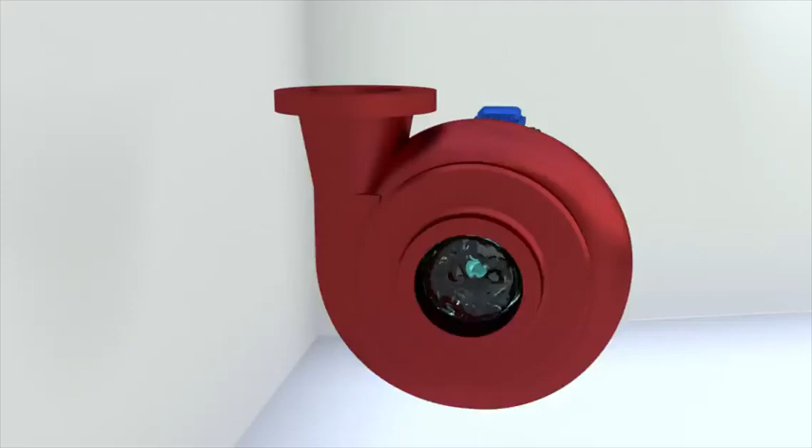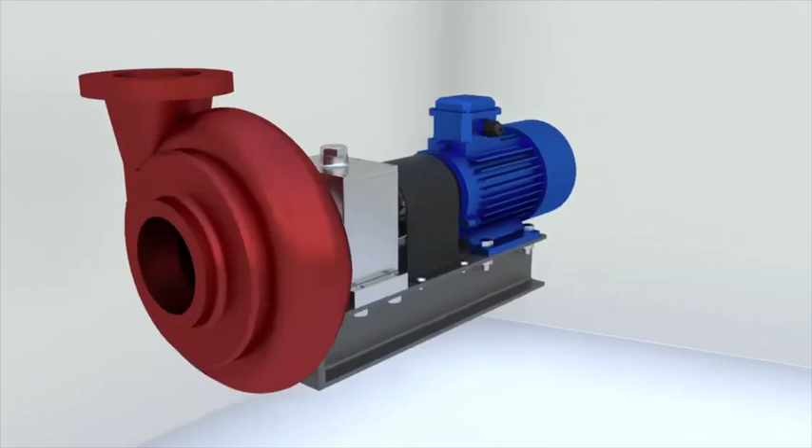How does a centrifugal pump work? Centrifugal pumps are used to pump water, oil, and other liquids. Let's try to understand why these pumps are designed to carry out the task of transporting liquids successfully.

The main elements of a centrifugal pump are the casing and the impeller, which drives the liquid. The impeller is mounted on a shaft, and the shaft can rotate on bearings. The power is transmitted from the motor, most often an electric motor, to the shaft.

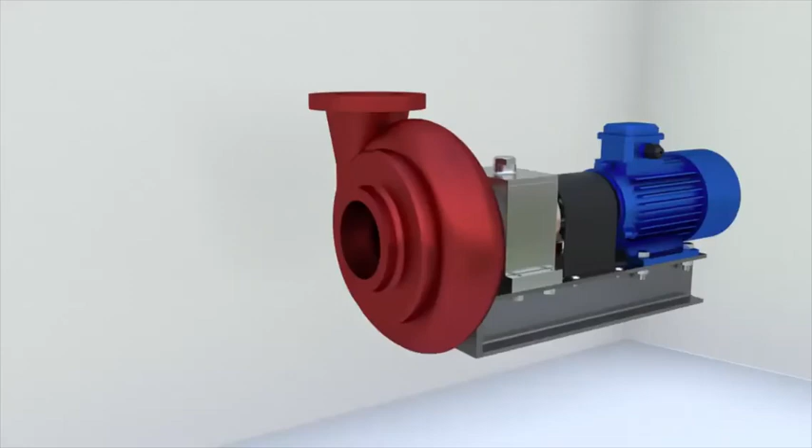The impeller of the pump rotates together with the shaft. The vanes in the impeller act on the liquid and make it rotate. The liquid particles are accelerated, and as a result of the impact of the vanes, the energy of the liquid flow is increased.

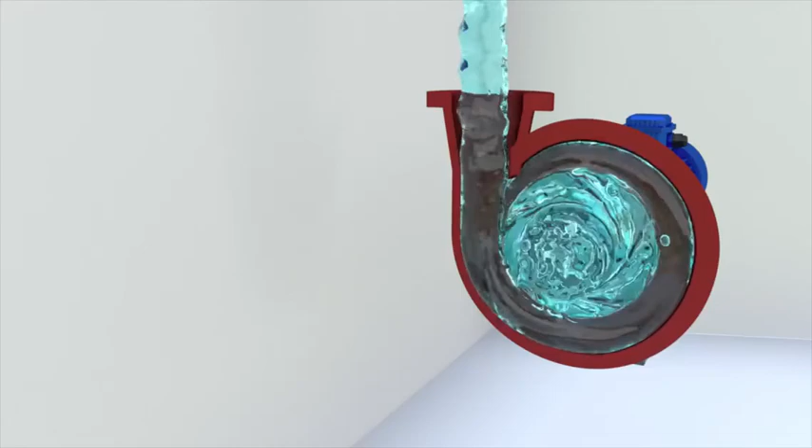The accelerated liquid particles enter the volute, which converts part of the velocity into pressure. The diameter of the passage section of the volute and the discharge nozzle gradually increases. The fluid velocity decreases, and the pressure, according to Bernoulli's law, increases.

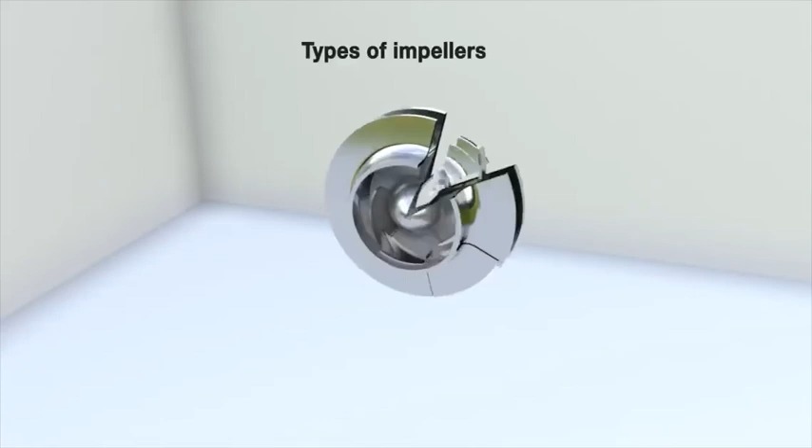Three main types of impellers are used in centrifugal pumps: closed, with back and front discs, vanes and fairings; semi-open, with the vanes free on the front side; and open, with the vanes free on both sides.

If bearings support only one side of the shaft, the pump is called a cantilever pump. It is a versatile design used in small and medium-sized pumps. A heavy impeller cannot be cantilevered.

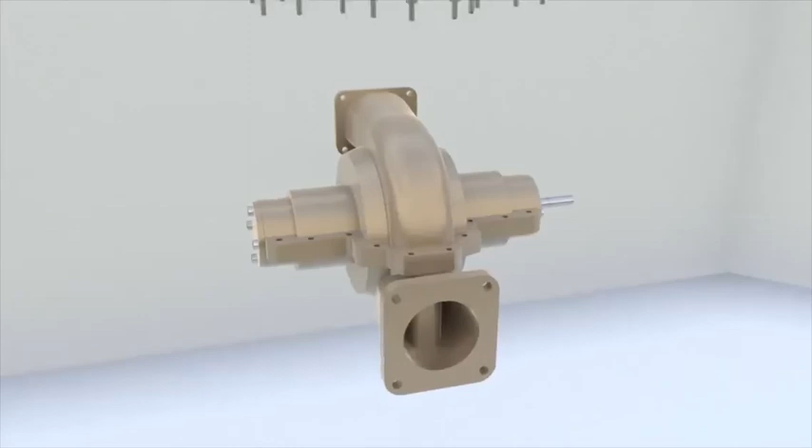In this case, the shaft is mounted on bearings and the impeller is placed between them. This construction scheme is well suited for double suction impellers, where the vanes are placed on both sides.

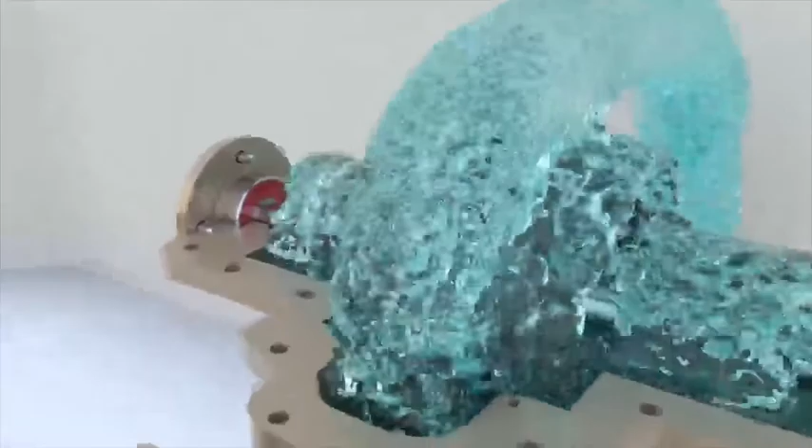A double suction impeller allows liquid to enter the impeller blades from both sides. Thus, we have two pumping units without significantly increasing the weight and dimensions of the pump. This scheme is relevant for pumps with high capacities, because the pumping units are installed in parallel.

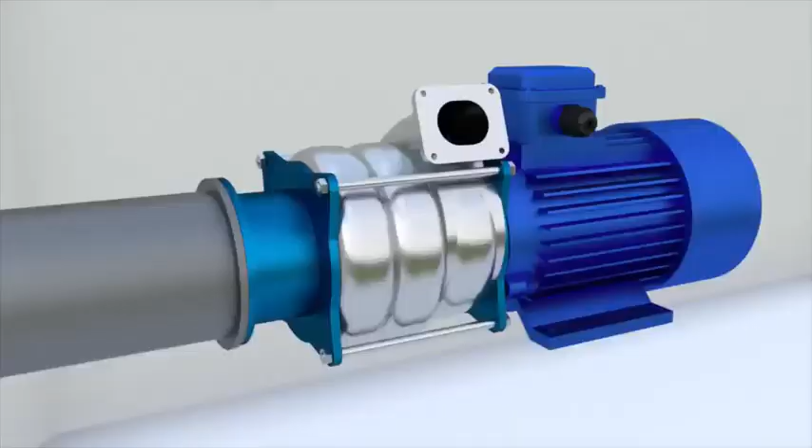Multi-stage centrifugal pumps: by installing pumps in series, the head of the liquid can be increased in the system. Pumps installed in series can be combined by placing several impellers in the same casing. The liquid will go from the first impeller to the second one, from the second impeller to the third one,

and so on. Using a multi-stage arrangement can increase the head of the pump many times over, as the impellers are mounted in series, and each of them increases the head.

In multi-stage pumps, different impellers can be used. For example, a screw centrifugal pump has an auger on the first stage and a centrifugal impeller on the second stage. When the pump is running, the liquid flows continuously into the pump casing through the suction nozzle.

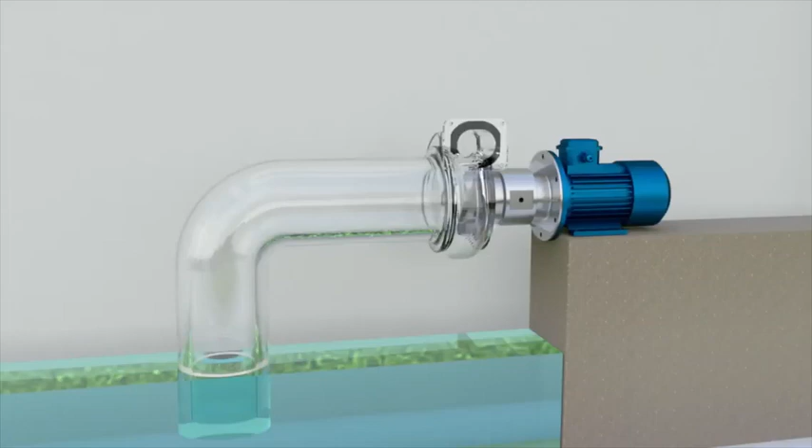But what happens if there is no liquid in the pump? For example, when the pump is first switched on, the pump casing will be empty. For the liquid to fill the pump, the pressure in the pump casing has to be lower than the atmospheric pressure. Then the atmospheric pressure will cause the liquid to fill the casing.

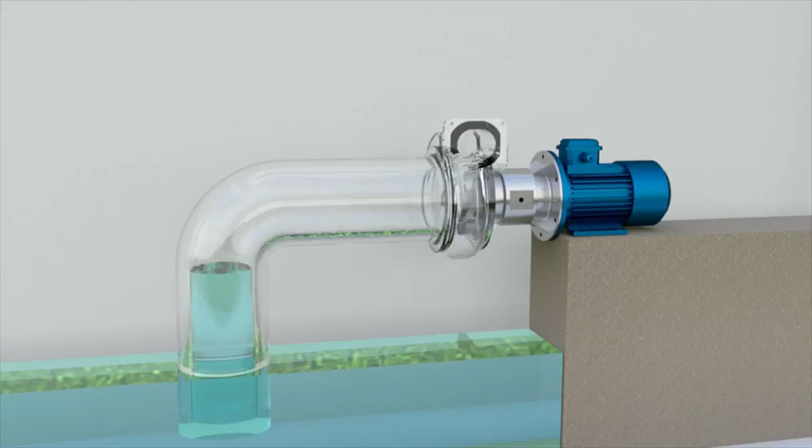To reduce the pressure in the pump, some of the air has to be pumped out of the casing. Is an ordinary centrifugal pump able to do this? The answer is no, because the particles move in the pump due to inertia, which depends on mass.

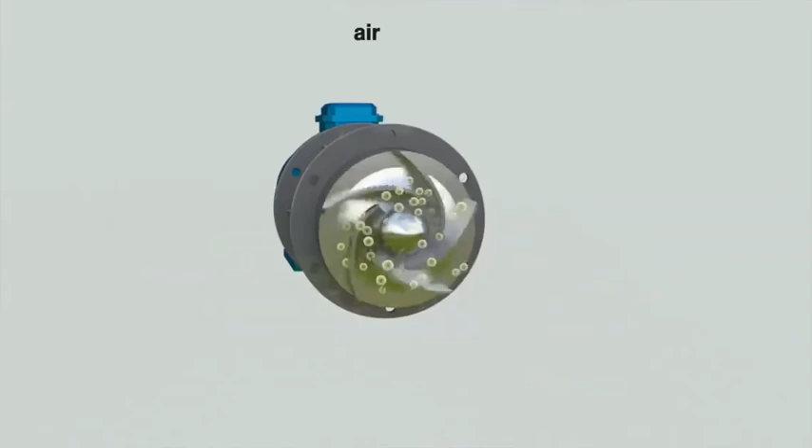The mass of air particles is much lower than that of water particles, so it is impossible to pump air at the speeds that a centrifugal pump operates at. For this reason, centrifugal pumps must be primed before switching on, either through a special channel in the casing or